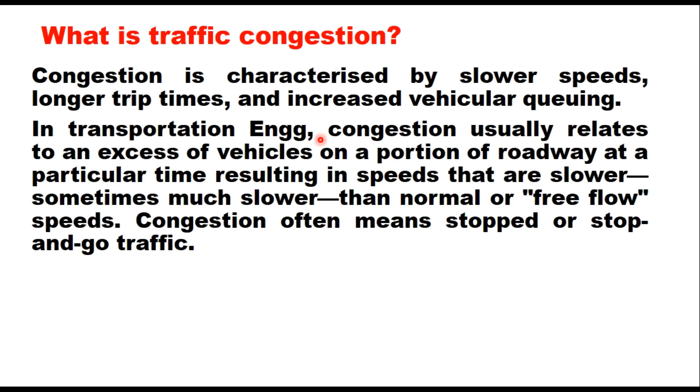Now, what is traffic congestion? Traffic congestion is characterized by slower speeds, longer trip times, and increased vehicular queuing. In transportation engineering, congestion usually relates to an excess of vehicles on a portion of roadway at a particular time, resulting in speeds that are slower, sometimes much slower, than normal or free flow speeds. And congestion often means stopped or stop and go traffic.

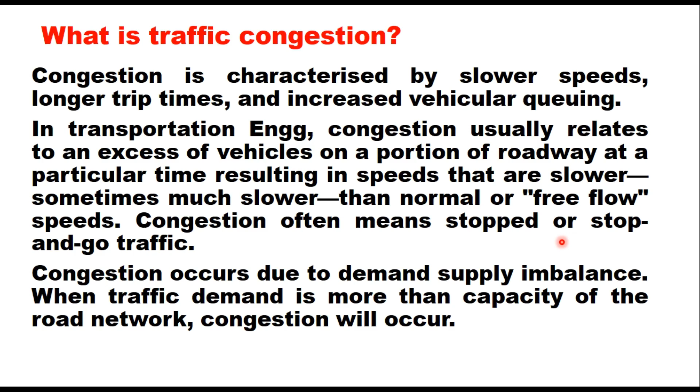Congestion occurs due to demand-supply imbalance. When traffic demand is more than capacity of the road, congestion will occur. So every road has some limits on its capacity. And just for explanation, let us assume that this limit is 1500 cars per hour. So if 1400 cars try to use the road, there are no capacity problems and everything works fine because the traffic on that particular road is less than the capacity.

But during rush hours, there may be 1600 cars attempting to access the road at once. Then congestion occurs and traffic will slow down to a crawling speed. Now this affects not only the last 200 cars which are joining this road, but also the 1400 original drivers.

Now the question is how to persuade these 200 drivers of this total 1600 cars to shift their road usage outside the rush hour, or maybe use some public transport system, so that the remaining 1400 vehicles will be able to enjoy short and predictable journey times.

Now one way of achieving this is to ban their entry completely, and that can be done by several policy measures like the odd and even system which was adopted once in Delhi. But this system does not work well because it does not take into account the requirement of people to travel.

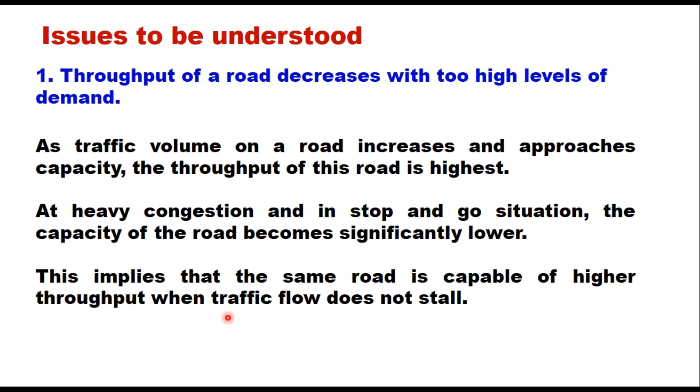There are three issues to be understood before you go for congestion charging. Number one, throughput of a road decreases with too high levels of demand. As traffic volume on a road increases and approaches capacity, throughput of this road is the highest. When the traffic flow is at capacity, the throughput of the road is maximum. At heavy congestion and in stop and go situations, the capacity of the road becomes significantly lower, meaning the traffic volume which can be accommodated is very low. This implies that the same road is capable of higher throughput when traffic flow does not stall or is not in a stop and go situation.

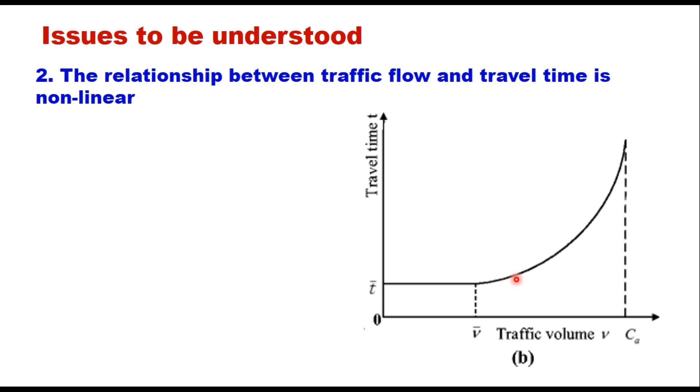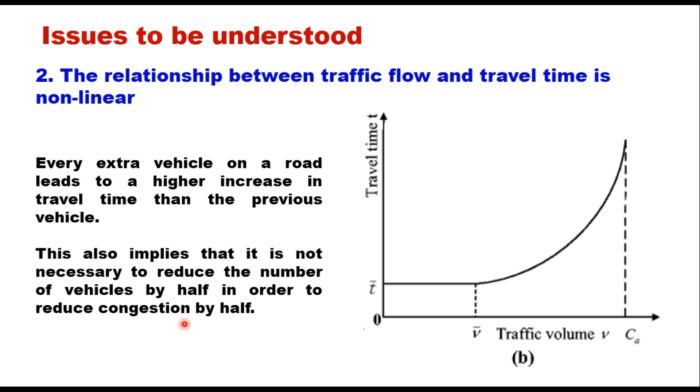Number two, the relationship between traffic flow and travel time is non-linear. This is explained in this figure. Up to a particular traffic volume, travel time does not depend on flow. This is the traffic volume where drivers are free to choose their speed, generally LOS B. When traffic volume increases beyond this limit, travel time increases exponentially. So every extra vehicle on a road leads to a higher increase in travel time than the previous vehicle. This also implies that it is not necessary to reduce the number of vehicles by half in order to reduce congestion by half.

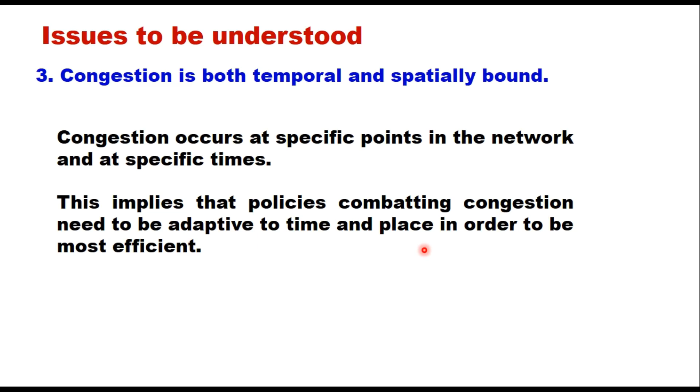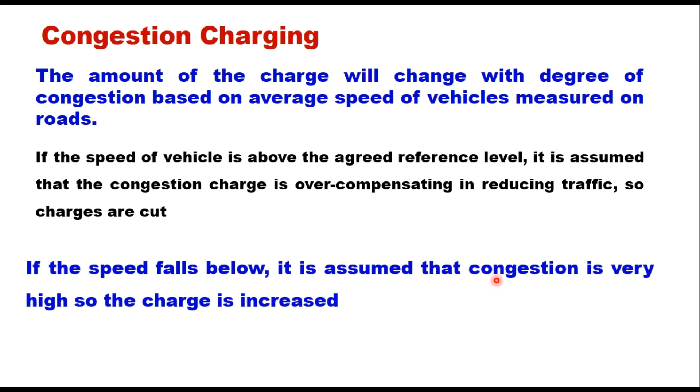And the third point is that congestion is both temporally and spatially bound. Congestion occurs at a specific point in the network and at specific times. This implies that policies to reduce congestion need to be adaptive to time and place in order to be most efficient. The philosophy of congestion charging is that the amount of charge will change with the degree of congestion, based on the average speed of vehicles measured on roads. If the speed of vehicles is above the agreed reference level, it is assumed that the congestion charge is overcompensating in reducing traffic, and therefore the charges are cut. If the speed falls below, it is assumed that congestion is very high, so the charge is increased.

Now, there are several types of congestion pricing, and the most implemented forms worldwide are like this. It can be flat rate tollways, or it can be congestion pricing. Congestion pricing can be of different types: cordon pricing, area-wide pricing, high occupancy toll lanes, variable tolls on entire roadways, or time, distance and/or place-based pricing. I will explain each of these very briefly in the coming slides.

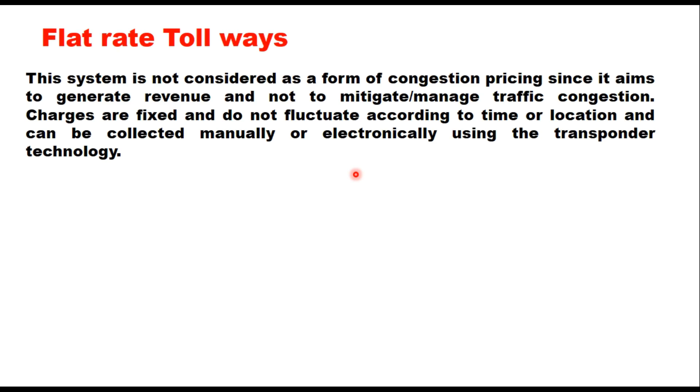The first is flat rate tollways. This system is not considered a form of congestion pricing because it aims to generate revenue and not to mitigate or manage traffic congestion. Charges are fixed and do not fluctuate according to time or location, and can be collected either manually or electronically using transponder technology. This is generally what you see on a toll road, where a fixed amount of toll is collected from a vehicle for using a particular road. There, the objective is to collect revenue, not to manage traffic.

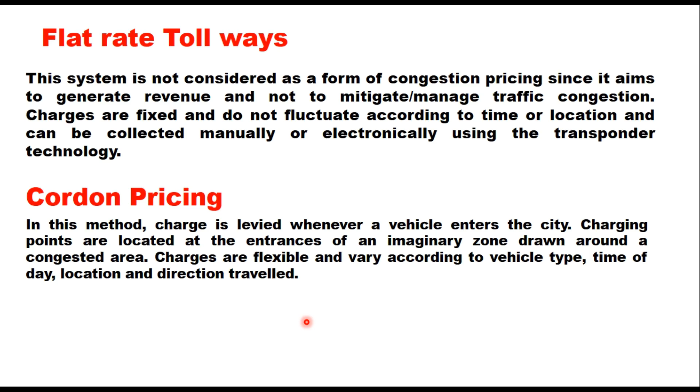Cordon pricing. In this method, a charge is levied whenever a vehicle enters the city. Charging points are located at the entrances of an imaginary zone drawn around a congested area. Charges are flexible and vary according to vehicle type, time of day, location and direction traveled. One aspect of this policy is restricting the growth of automobile usage by levying a charge on travelers when they cross the priced zone. Cordon pricing in London and Stockholm has been very successful in reducing congestion levels and travel time, and also in generating revenue to support transport strategies in these two cities.

Next is area-wide pricing. Now, it is different from cordon pricing in that it charges travelers a fixed fee for traveling across the cordon area for an unlimited number of journeys into and within the zone. Now, this toll strategy imposes cordon crossing charges for entering a certain geographical area.

Now, this is similar to what Municipal Corporation of Delhi has adopted. Whenever commercial vehicles enter Delhi from any direction, it will charge a fixed price, and that is for entering into the city. It doesn't matter how many trips it makes inside the city. It is less effective than cordon pricing at reducing congestion since the fees are fixed and do not change with the number of trips to and from the priced zone.

The next is high occupancy toll lane. Now, in this method, certain lanes are earmarked for shared car use. Ride-sharing travelers can use HOT lanes for free or at a discount, while single occupant vehicles or those that do not meet the minimum passenger occupancy requirements to access the lanes must pay. All vehicles still will have the choice to travel in free, parallel or general purpose lanes.

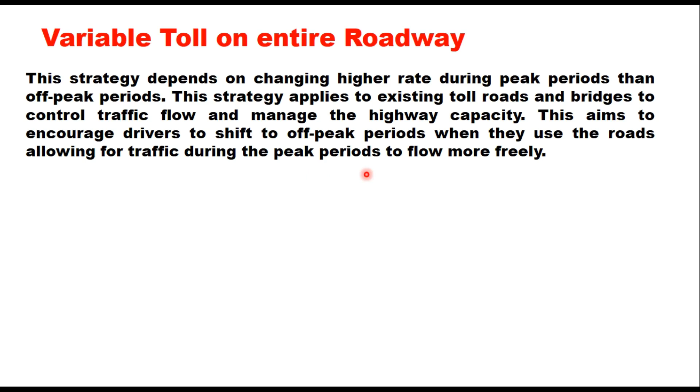Variable toll on entire roadway. This strategy depends on charging a higher rate during peak periods than off-peak periods, and it applies to existing toll roads and bridges to control traffic flow and manage the highway capacity. This aims to encourage drivers to shift to off-peak periods when they use the roads, allowing traffic during the peak period to flow more freely.

And the last one is time, distance, and/or place-based pricing. In this method, travelers are charged based on the distance traveled, location, vehicle type, and time of the day, and sometimes even day of the week also. This system is implemented in Germany for all heavy-duty trucks operating on the national system. Netherlands is also in the process of developing this system for its entire street and road network.

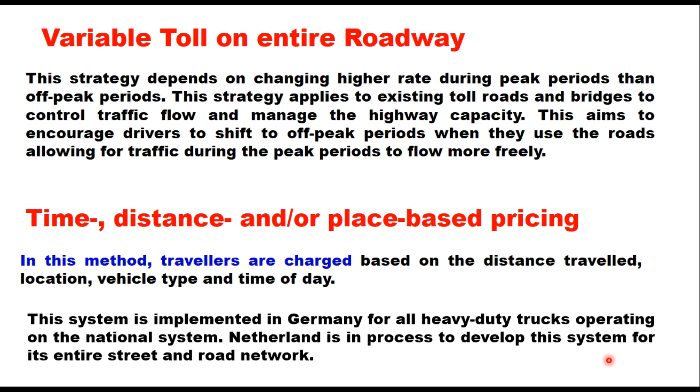There are many technologies that can be used for road user charging or congestion charging. The first one is automatic number plate recognition system. Now, in this system, a beacon mounted on roadside equipment communicates with the electronic tag fitted in the vehicle, and when the vehicle passes a charging point, the registration plate of the vehicle is captured by this reader and charged accordingly. It is similar to the FASTag system being used on our highways nowadays.

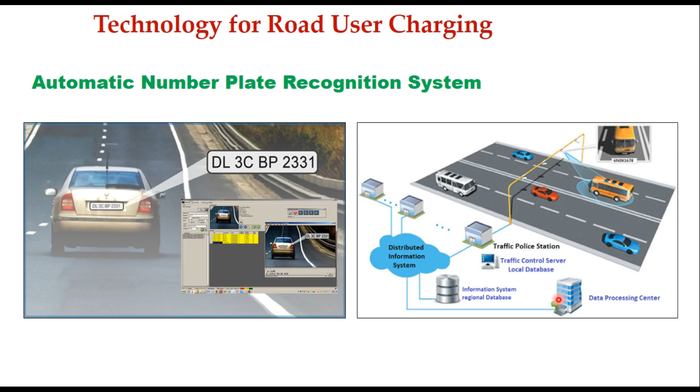Advantage of this method is that no onboard equipment is required, but disadvantage is that it is not flexible or adaptable. The toll remains constant throughout the day and throughout the month. It requires the driver to opt in, and sometimes accurate readings are difficult, particularly in poor weather conditions, insufficient lighting, or non-standardized license plate fonts.

The second method is dedicated short range communication system, that is also called DSRC. Now, this is a wireless communication technology designed to allow vehicles in the intelligent transport system to communicate with other vehicles or with infrastructure. It operates at 5.8 gigahertz radio frequency and is very effective over short to medium distances.

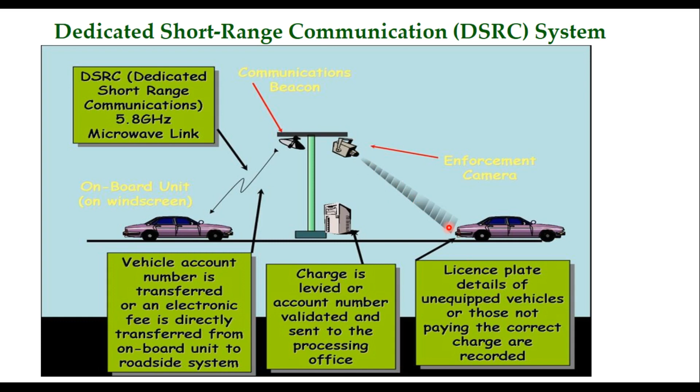Now here this is the communication beacon, and the vehicle has an onboard unit on the windscreen. When the vehicle passes through this point, it communicates with this beacon and the vehicle account number is transferred, or the fee is directly transferred from the onboard unit to the roadside system. For vehicles which are not fitted with the onboard unit, the registration plate is captured by this camera and then the bill is sent to their home address.

Advantage of this method is that the charge can be automatically deducted for a registered account holder. It is flexible and easy to make changes to the changing tariff. The disadvantage is the problem for occasional users who have to fit the device into their cars. So if you are not a regular user of the highway, then you have to unnecessarily fit the device on your windscreen.

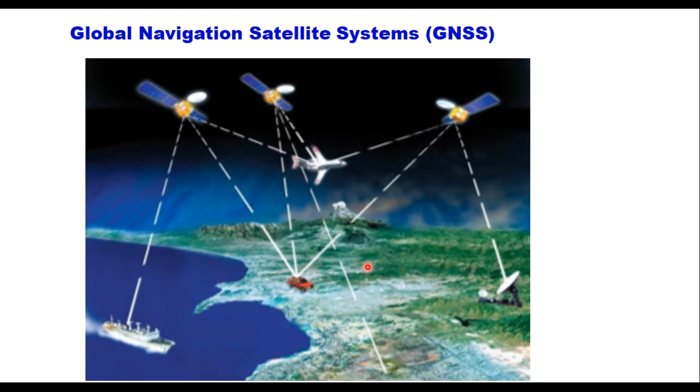The next one is Global Navigation Satellite System, GNSS. It uses GPS and a two-way communication link. Here charges for using any road are collected through GNSS sensors which are fitted inside the vehicle. Through this technology, distance-based pricing is possible, and there are many advantages of this technology.

Virtual charging points can be created that do not require roadside equipment. And with an automatic system, a much more detailed pricing system can be devised according to the time of entry, distance, place of the vehicle, and prevailing pollution, etc. And the Ministry of Road Transport and Highways, Government of India is also considering installing this technology on national highways in the country so that toll can be charged based on the length of the highway used by a road user.